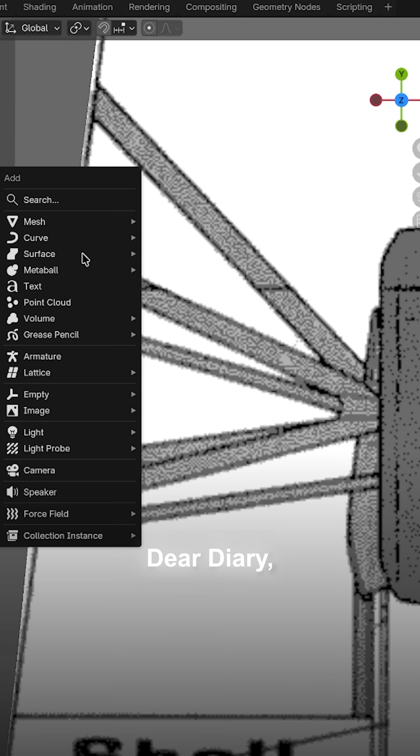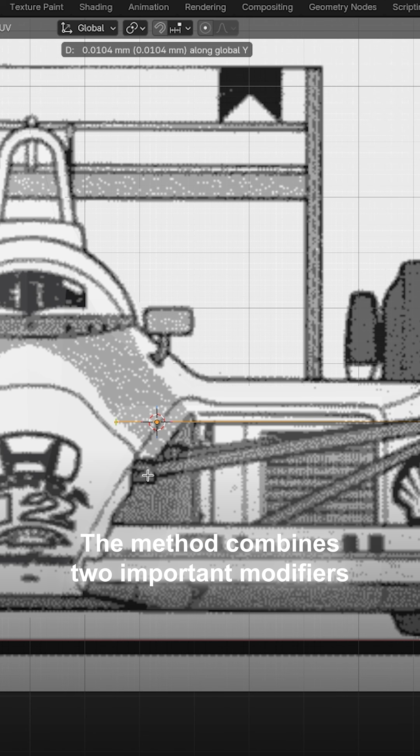Dear Diary, today I focused on modeling the suspension system and wheels of Senna's McLaren MP4/4. This time I experimented with a technique based on starting from a single vertex, created with an extra mesh add-on. I learned this workflow from Roman Klčo, the creator of the Polygon Runway channel. The method combines two important modifiers, screw and solidify, which allows simple geometry to evolve into complex shapes.

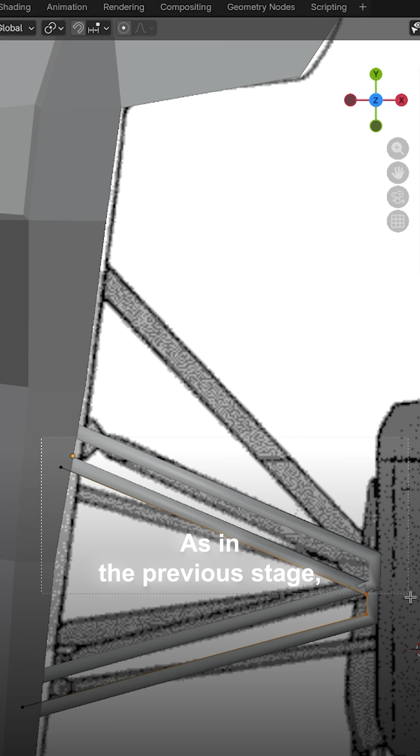I began with extruding the single vertex according to my reference images, gradually building the suspension arms segment by segment. After creating one element, I duplicated it to construct additional parts, which significantly sped up the process. As in the previous stage, I also used the mirror modifier, because many components of the suspension are perfectly symmetrical.

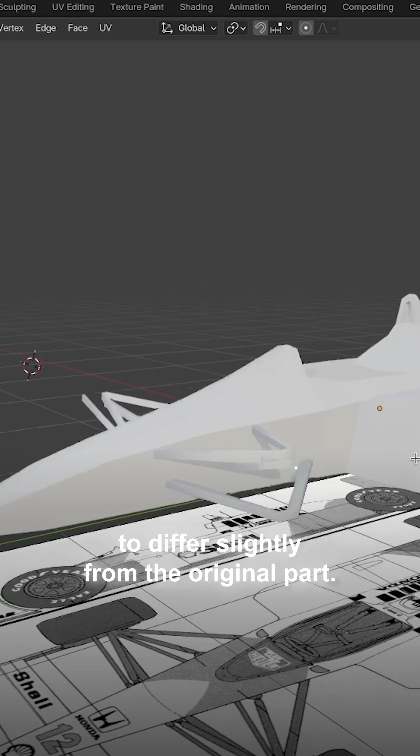However, an important lesson appeared during this process: the order of modifiers matters a lot. At first, I placed the mirror modifier at the end of the modifier stack, applying screw and solidify before it. This caused the mirrored geometry to differ slightly from the original part. After swapping the modifier order and placing mirror earlier in the stack, everything aligned correctly and behaved as expected. It was a small discovery, but a very valuable one.

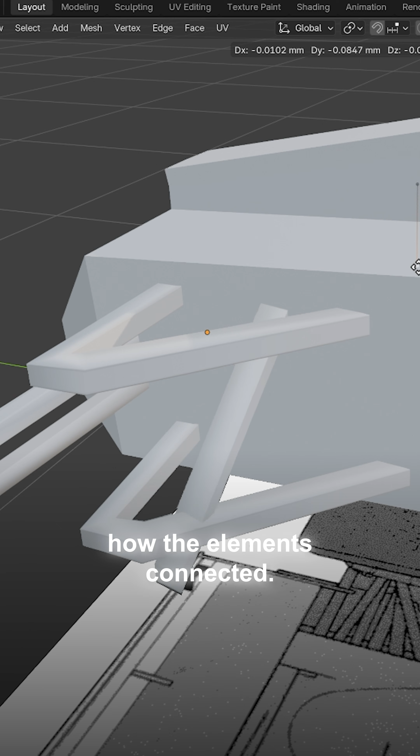Some parts of the suspension were not clearly visible in the reference blueprints, so I relied on real photographs of Senna's McLaren to better understand how the elements connected. Unlike on some companies' interpretations, I modeled the front wheels smaller than the rear wheels to match the real proportions of the car. I inset and extruded the central section of the wheels to add more detail, and I applied bevels to soften the edges and achieve a more realistic look.

In the next part, I plan to model the front and rear wings and start adding aerodynamic details that will give the car more character.